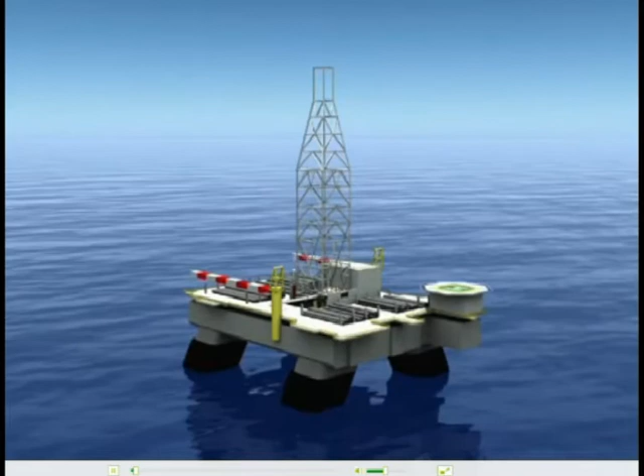This video summarizes the findings and analysis of this investigation team. As I review these, it's important to keep in mind the goals of the investigation. Our team was assembled immediately after April 20th in order to identify the critical factors underlying the accident.

Our mandate was to determine what happened so that BP could take whatever steps necessary to prevent a similar accident from ever happening again. Our purpose was not to apportion blame or liability, but rather to learn, recommend areas for improvement, and share our lessons with others.

While I believe that we had sufficient evidence to reach the findings summarized here, our work was limited by a lack of direct access to some witnesses and to certain physical evidence. I will be presenting our findings factually, but it is important to note that our purpose was not to create a record that would serve as the definitive or final word on what happened.

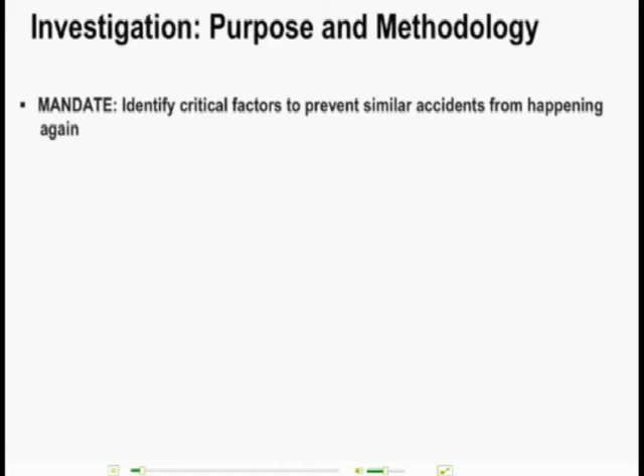The investigation team consisted of more than 50 internal and external engineering specialists with expertise in various aspects of deepwater drilling and exploration. We worked over a 4-month period examining all available evidence.

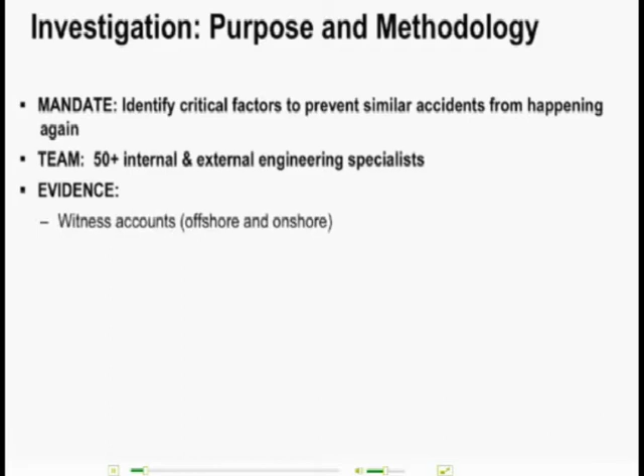This visual portrayal of our key findings is best viewed in the context of the report, which describes more fully the basis for findings. The findings were based on witness accounts, analysis and modeling, as well as engineering drawings, real-time data from the Deepwater Horizon, physical evidence, and testimony gathered from governmental inquiries.

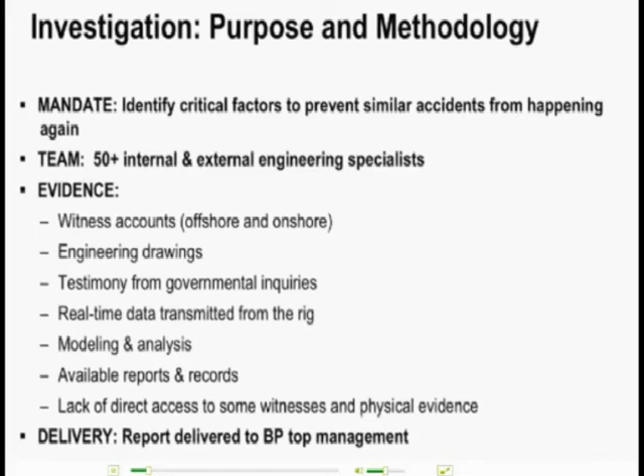The team's report was delivered to the board and BP's top management. They are sharing it publicly in order to keep the public informed, to assist with the government's various investigations, and to ensure that BP and the industry can learn from the accident and take appropriate actions going forward.

To determine what led to the tragedy, it's important to first understand the events that occurred aboard the Deepwater Horizon leading up to the accident.

This short animation depicts the best understanding the team was able to reach about the chronology of key events as we understand them today. This is an animated reconstruction of the tragic accident aboard the Deepwater Horizon on April 20th, 2010. Specifically, this narrative has been developed to illustrate what we determined were the key events related to the accident. The animation contained in this narrative is representative and for illustrative purposes only, and has not been drawn to scale.

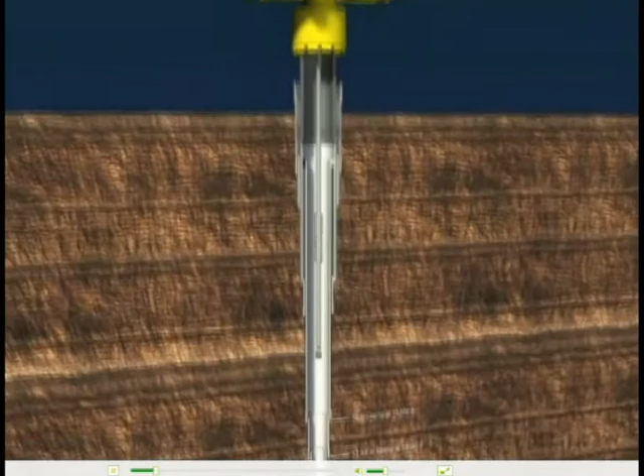The Deepwater Horizon was a dynamically positioned drilling vessel whose construction was finished in 2001. It was designed to drill in water depths up to 10,000 feet. The vessel arrived on the Macondo location on January 31st, 2010, to finish the exploratory well that had been started earlier by its sister vessel.

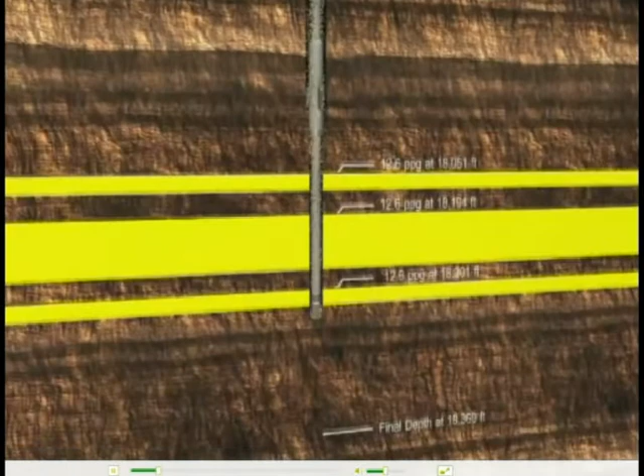The riser and the BOP were installed successfully. 4 casing strings were installed over a 2.5-month period. Our narrative begins on April 9th, 2010. The final hole section of the well was drilled to a total depth of 18,360 feet. The long string production casing was installed.

During the afternoon of April 19th, the cement job started. Cement is used as a barrier to seal the wellbore from the reservoir sand. Nitrified foam cement was pumped into the annulus and non-foam cement was pumped into the shoe track. At this point, the pump pressure was bled off and it appeared that the check valves in the float collar were holding. It's now the morning of April 20th.

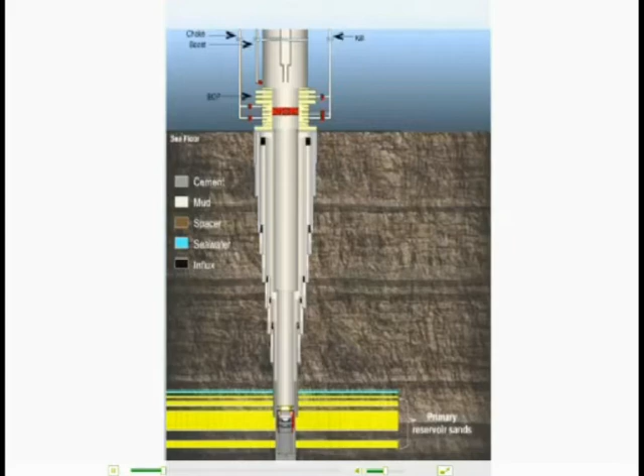The wellhead seal assembly was installed and tested. A positive pressure test, which is the first integrity test of the well, was conducted by closing the blind shear rams and applying 2,700 psi of pressure. The test confirmed integrity of the blind shear rams, the seal assembly, casing, and top wiper plug.

The shoe track, which also plays a key role in isolating hydrocarbons, is not tested because of the presence of the top wiper plug. It's now early afternoon.

The drill pipe was run to 8,367 feet in preparation for the negative test, the second test of the well's integrity. The test's purpose was to place the well in a controlled, underbalanced state to test all mechanical barriers. It was conducted by displacing some of the mud in the well with a spacer, followed by seawater.

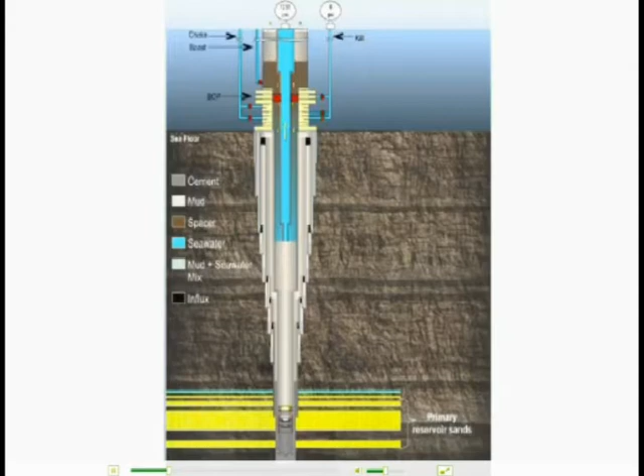After displacement, the upper annular preventer was closed. An attempt to bleed the system down to 0 psi was made, but fluid in the riser was leaking past the annular preventer. It's now 1708.

The hydraulic closing pressure for the annular preventer was increased to 1900 psi in order to create a tighter seal against the drill pipe. The riser was filled with an estimated 50 barrels of mud to replace the volume that had leaked past the annular.

At 1727, the drill pipe valve was opened and the pressure reduced to 0 by bleeding off 15 to 23 barrels of seawater. It's now 1735.

The well site leader advised the rig crew that the negative test procedure needed to be conducted on the kill line to meet permit requirements. The drill pipe valve was closed and the testing reconfigured for flow to be monitored on the kill line.

At 1752, the kill line valve was opened. Based on eyewitness accounts, somewhere between 3 and 15 barrels of seawater were bled off. The kill line valve was closed and the drill pipe pressure gradually increased.

It's now 1842. Seawater was pumped into the kill line to confirm that it was full. The kill line was routed to the mini trip tank, and less than 1 barrel was bled from the kill line. The flow stopped. The kill line was monitored for 30 minutes and showed no flow, but the drill pipe pressure remained at 1400 psi.

A discussion about the source of the 1400 psi took place. It was explained as a phenomenon called the bladder effect. The test was deemed successful.

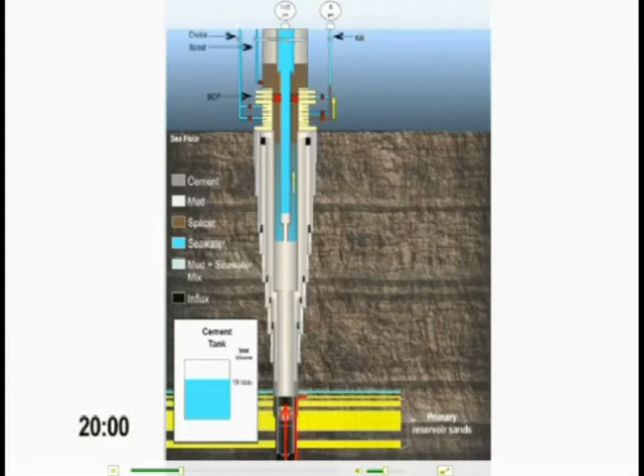It's now 2000 hours. As part of normal operations to temporarily abandon the well, the crew began to displace the remaining drilling fluid with seawater. To start this operation, the annular preventer was opened and the well returned to an overbalanced condition, preventing further influx into the wellbore.

The displacement continued as planned and the well went underbalanced at 2052. This means the pressure in the well dropped below the reservoir pressure. The well started to flow.

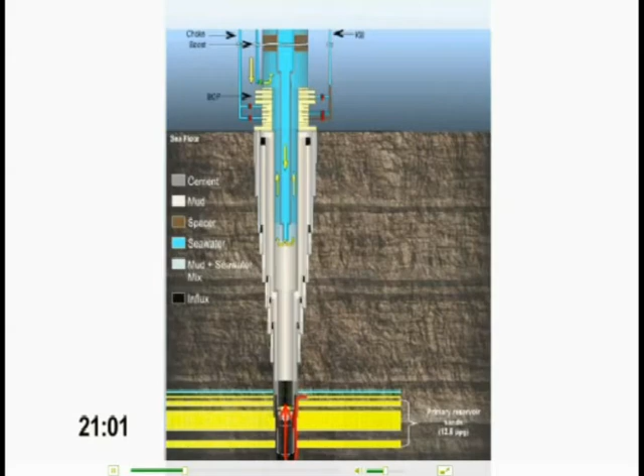It's now 2101. The crew was emptying the trip tank, which likely masked any flow indications on the flow meter. At this point, with constant pump rate, pressure should have declined as the heavier mud was being replaced with lighter seawater. Instead, drill pipe pressure increased by 100 psi, indicating a problem with the well.

Analysis of real-time data shows that a 39-barrel gain was taken by 2108. It was then time for the sheen test on the spacer, which is done in order to check that there is no free oil in the fluid that will be discharged to the sea.

The pumps were shut down when the spacer reached the surface. A sheen test was performed, and the spacer was determined to be suitable for discharging overboard. The drill pipe pressure increased by 246 psi in 5.5 minutes while the pumps were off.

The fluid returned from the riser was routed to the overboard dump line. During this period, our modeling suggests that the well was flowing at an estimated 9 barrels per minute.

Displacement of the mud with seawater resumed at 2114. It's now 2131. All mud pumps were shut down. An estimated 300-barrel gain has been taken.

Over the next 5 minutes, the drill pipe pressure increased by 556 psi. Rig personnel discussed the differential pressure on the drill pipe.

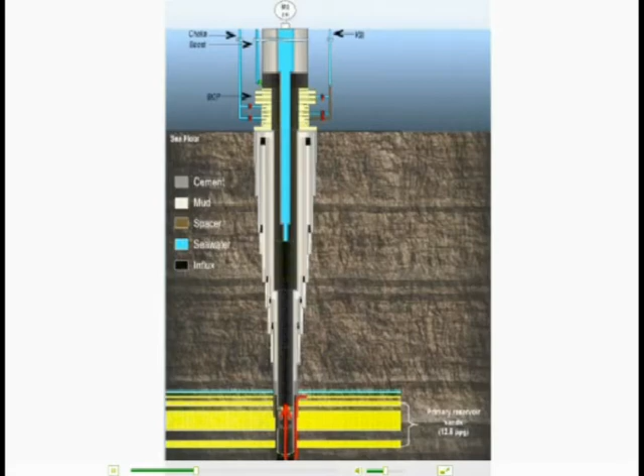In the next 2 minutes, it appears an attempt was made to bleed the drill pipe, possibly to investigate the differential pressure. Over the next 20 minutes, a series of critical well control events occurred, ending in the order to abandon ship. It's now 2140.

Mud overflowed onto the rig floor. A minute later, the mud shot up through the derrick. The diverter was closed and flow was diverted to the mud gas separator.

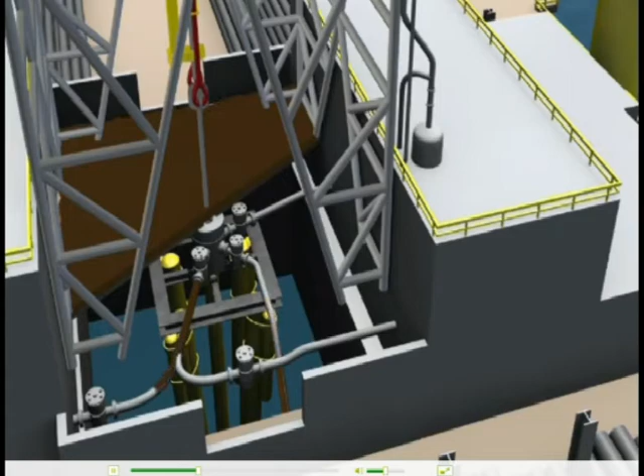At about the same time, the rig crew appeared to close an annular preventer and drill pipe pressure increased steadily from 338 psi to 1200 psi over a 5-minute period. Mud and hydrocarbons discharged onto the rig and overboard.

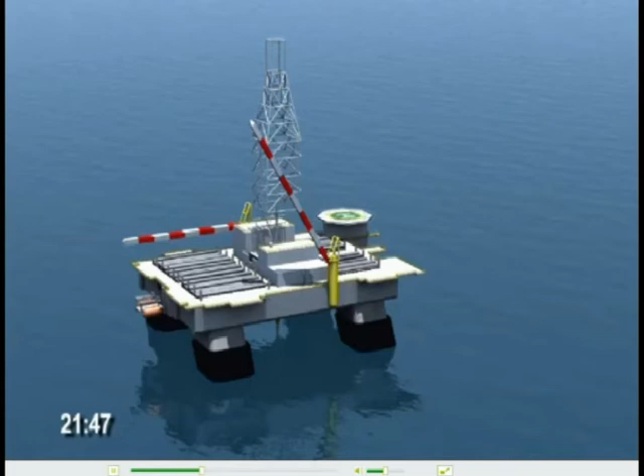Activation of the annular preventer appears to have failed to seal the annulus. It's now 21:47. The first gas alarm sounded. A cloud of gas spread, setting off other gas alarms. There was a roaring noise and the vessel vibrated.

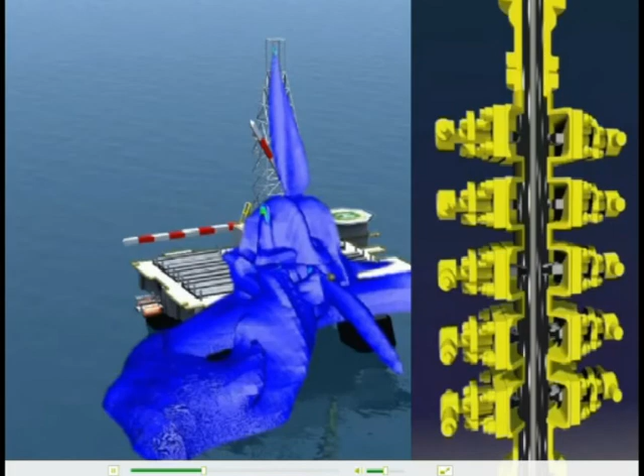The drill pipe pressure rapidly increased to 5,730 psi, which is thought to be the result of the BOP sealing around the drill pipe, likely after activation of the variable bore rams or the annular preventer fully sealing.

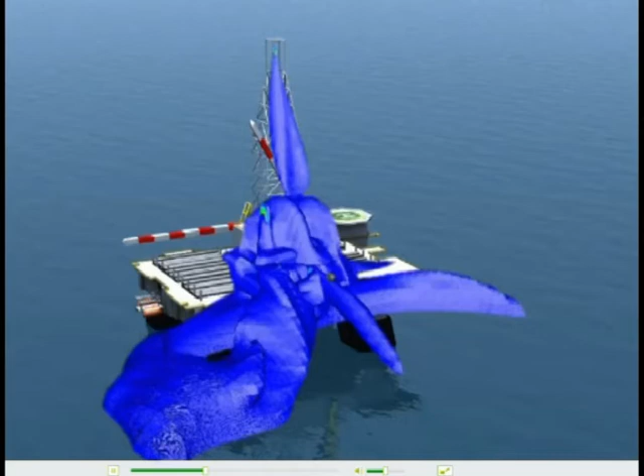One minute later, the combustible gas cloud reached the aft starboard quadrant of the main deck and probably entered the air intakes for the engine room. Gas also dispersed under the deck and into the engine room enclosures. The main power generation engines went into overspeed.

Within another minute, electrical power was lost and there were two explosions. The first occurred at about the same time as the power loss. The second occurred an estimated 10 seconds later.

The second explosion appears to have taken place under the main deck in the aft starboard quadrant of the rig. The associated blast pressure wave traveled forward and caused extensive damage to the starboard side, potentially damaging the MUX cables, which allow the vessel to communicate with the BOP. The hydraulic line which powers the BOP may also have been damaged.

The fire and explosions may also have caused damage to the surface drill pipe equipment, resulting in hydrocarbons flowing to the surface through the drill pipe. The valve on the drill pipe was left open, exposing surface components to high shut-in pressure.

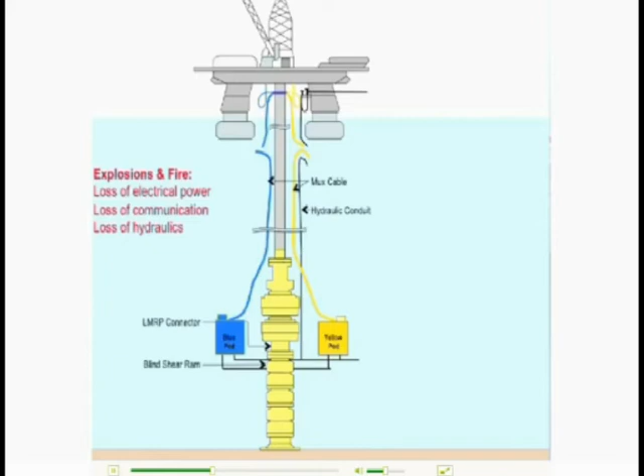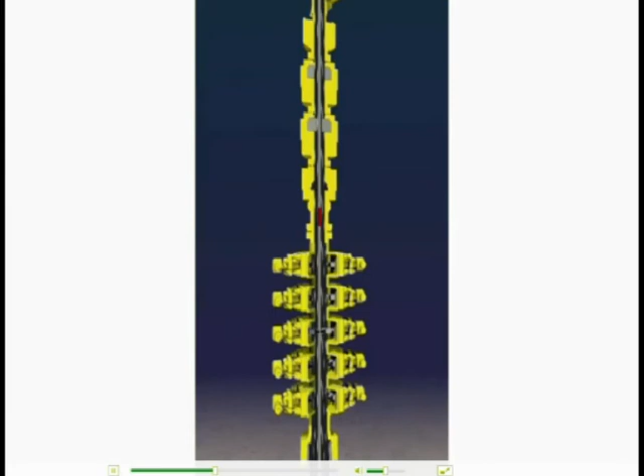While the BOP had closed around the drill pipe, it did not seal the well, and the subsequent loss of power may have resulted in the rig drifting off station. The drifting rig may have broken the BOP seal around the drill pipe and allowed hydrocarbons to continue to flow up the riser. One or a combination of these events ultimately allowed the fire to be continually fed.

It's now 21:52. Over the next 5 minutes, personnel attempted to shut in the well and disconnect the lower marine riser package from the BOP stack. The emergency disconnect sequence for the BOP was activated from the bridge.

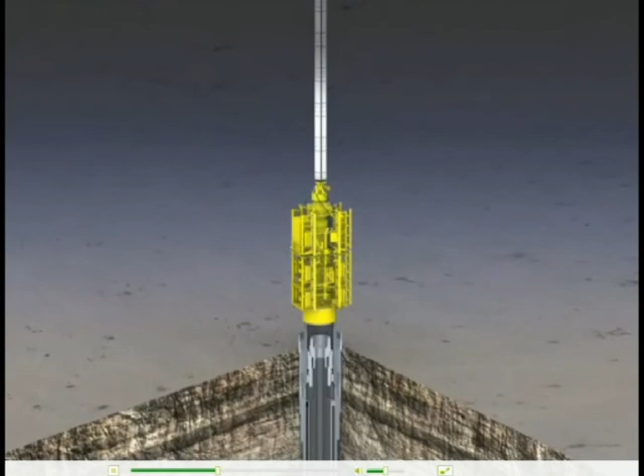While lights changed on the control panel, no flow was observed on the flow meters. It appears that the emergency disconnect system did not function. The lower marine riser package failed to unlatch from the BOP, and the BOP did not seal the well.

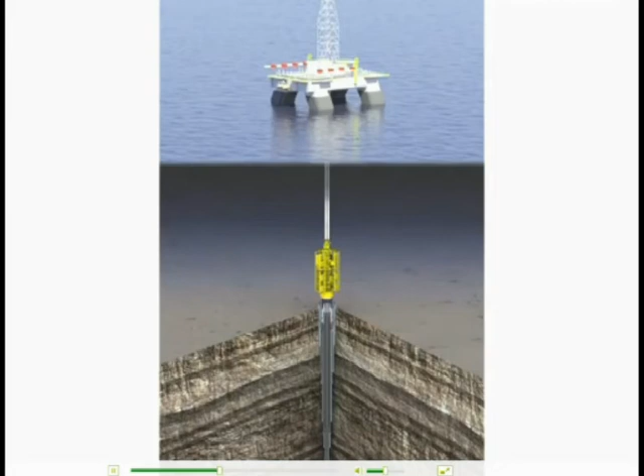With the Deepwater Horizon unable to disconnect from the well, the order to abandon ship was given at 2200 hours.

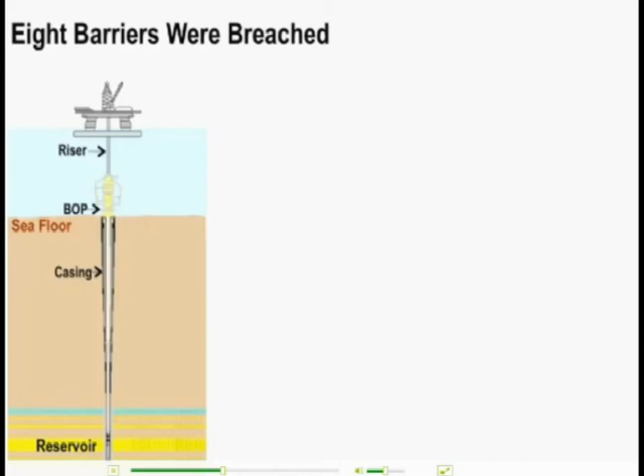This animated chronology has shown what we believe happened. Now we'll turn to an analysis identifying the contributing factors. As you'll see, we concluded that there was no single action or inaction that caused the accident. Instead, we found that there were 8 interrelated and contributing factors that led to this tragedy.

The first 2 findings of the investigation relate to hydrocarbons entering the well. We believe that the evidence shows that both the annulus cement barrier and the shoe track barriers did not isolate the hydrocarbons, allowing them to flow up the wellbore.

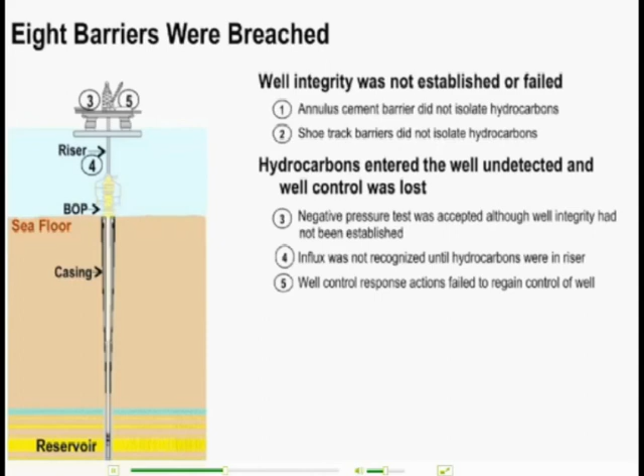The next 3 findings stem from evidence that the rig crew did not observe or recognize that hydrocarbons had entered the well before appropriate steps could be taken to contain them.

The negative pressure test conducted in order to confirm well integrity was incorrectly accepted. An influx of hydrocarbons was not recognized until it was too late to prevent the hydrocarbons from reaching the surface because they had already entered the riser. And well control response actions failed to seal and regain control of the well.

Our 6th and 7th findings relate to evidence that hydrocarbons came up through the riser and were dispersed across the vessel, creating the conditions for them to ignite. We found that the well flow was diverted to the rig's mud gas separator, causing gas to be vented onto the vessel rather than being diverted overboard.

Then, the vessel's fire and gas system did not prevent hydrocarbon ignition. Our 8th and final finding was drawn from evidence relating to the blowout preventer. With the loss of well control and subsequent explosions and fires, the BOP did not seal the well. Each of these findings is explained in greater detail throughout.